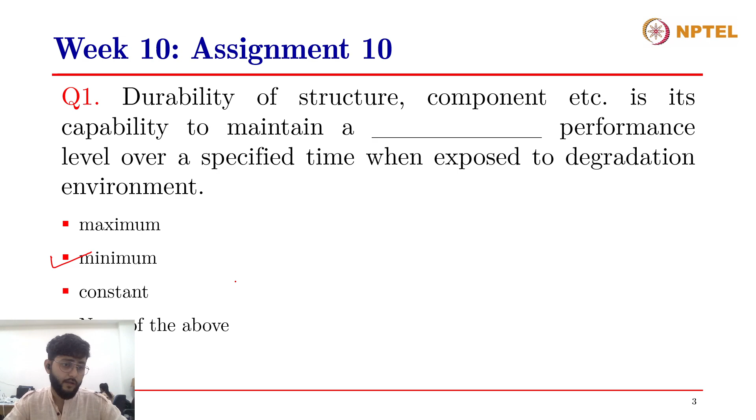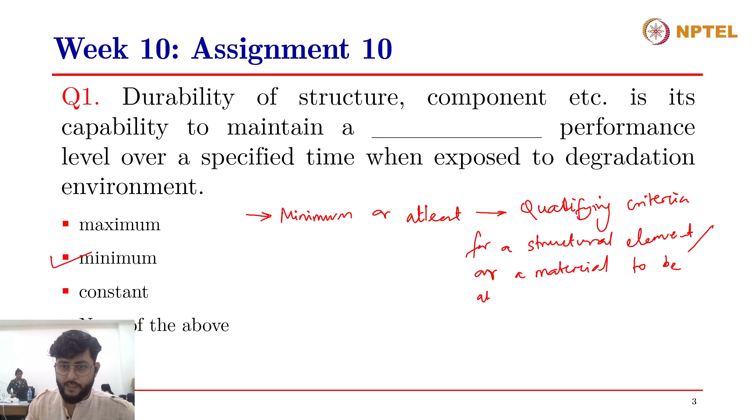Or when we talk about durability against fire, we rate our structures based on the R rating of a given element, meaning that a given beam or a given structural element should be able to sustain a fire of this degree till at least 3 hours or at least 4 hours. So we use these kinds of minimum criteria, minimum or at least. These words mention the qualifying criteria for a structural element or a material itself to be able to provide us with acceptable performance. Provide acceptable performance, right?

This is the answer to this question: durability of a structure is its capability to maintain minimum performance level over a specified time. Again, the keyword over here is specified time. You have to mention the time in which you want this performance level to be maintained.

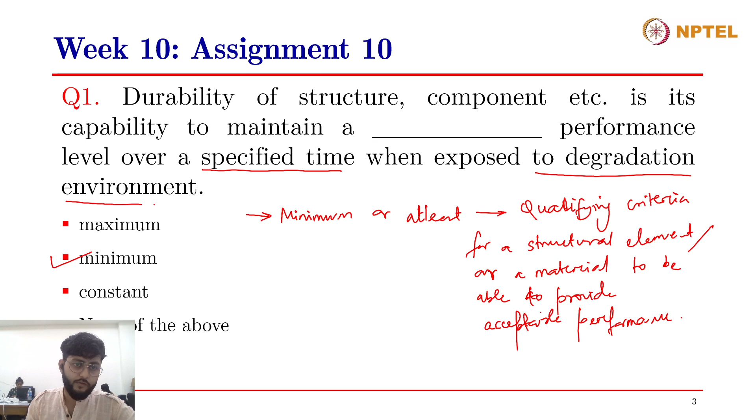And the second most important parameter of it is exposed to a certain degradation environment. A structure that is durable in one environment might not be durable in another environment. So you have to also specify the kind of environmental exposure that you are providing to the structure for it to qualify the degree of performance level that you're mentioning, right? So this is the correct answer to the question.

Moving on to the second question, it is an assertion and reasoning kind of a question. The assertion here mentions that magnesium sulfate ingress is more dangerous than sodium and potassium sulfate ingress. And the reason that they have mentioned is CSH is not stable in the presence of magnesium hydroxide. So you have to answer if the assertion is true, if the reason is true, and if the reason is the correct explanation of the assertion or not.

The assertion here, I'll repeat, magnesium sulfate ingress is more dangerous than sodium and potassium sulfate ingress. And the reason they have given is CSH is not stable in the presence of magnesium hydroxide. Yes? Can you answer this question? Yeah, assertion and reason are true, and reason is the correct explanation of assertion.

Right, right. Because this sulfate is more, chemically it is more dangerous than sodium sulfate. That is the reason I'm thinking that way. Mm-hmm. Thank you, Abdul. Yeah, that's the correct answer. But could you be more specific as to how magnesium sulfate is more dangerous as compared to sodium and potassium sulfate ingress? Like, how does it affect the system chemically?

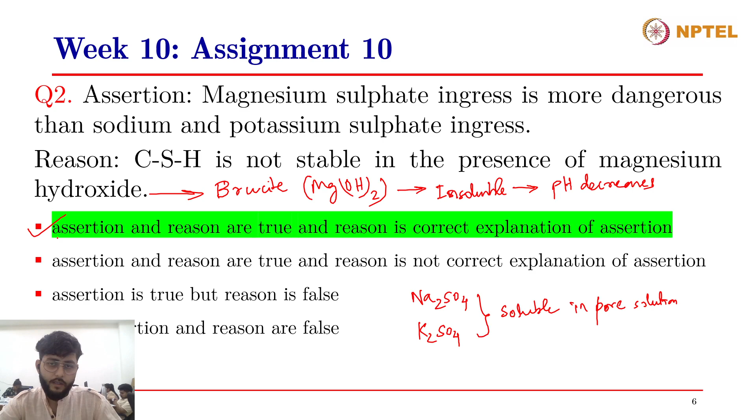All right. Moving to the third question. To improve resistance against sulfate attack, which of the following is reduced in the cement? C3S, C2S, C3A, calcium sulfate, CaSO4. This is alite, this is belite, this is aluminate, and this is calcium sulfate.

Yes, which of these is the correct answer? To improve the resistance against sulfate attack, which of the following phases is put in reduced amounts in the cement? That is aluminate. Reducing aluminate improves resistance against sulfate. That's why sulfate resistant cement is also used in this case, right?

Normally, especially for underground structures and all these things, if the soil has sulfate content, then sulfate resistant cement is recommended in such conditions, isn't it? Yeah, right. That is the answer. Answer C3A. That is the correct answer.

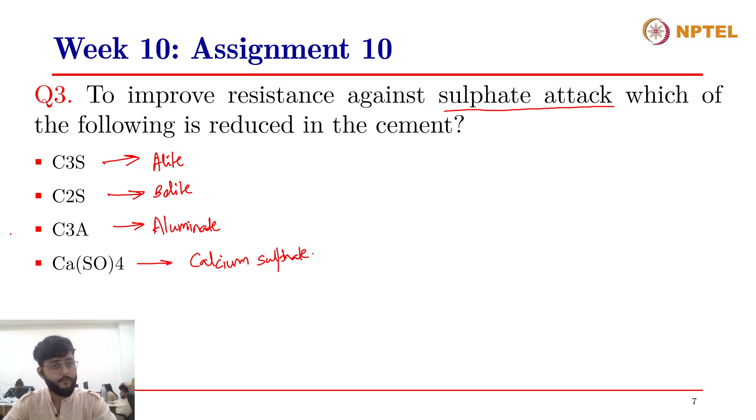That is a deterioration for the concrete. Some residues will form, and there is a tendency for cracking and all this. Right, right. Thank you, Abdul. So you're right over here. C3A content is reduced in order to improve the resistance against sulfate attack, and this is exactly why sulfate resisting cements have low C3A content. The aluminate content is low.

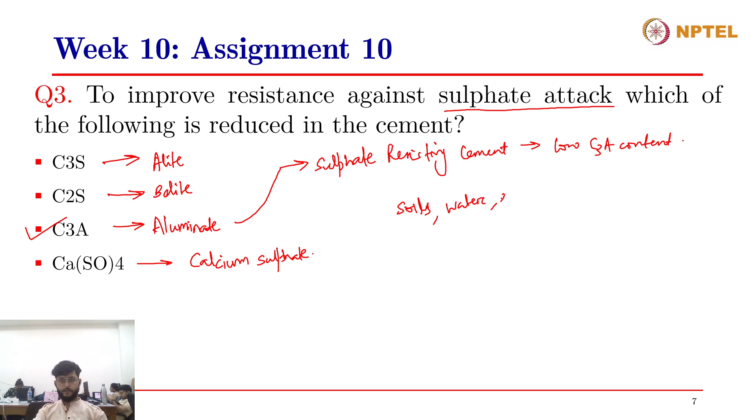What happens when there is excess of aluminates and the concrete undergoes a sulfate attack? Usually the source of sulfates is soils or water sources. From these sources, the sulfates come into the structures. Mainly foundations, structures in contact with the soil, bridge piers, retaining walls, and so on. Whatever structures are in direct contact with sulfate sources like soil or water.

When the cement has a high aluminate content, and we add some amount of gypsum in the cement as well, the aluminate and the gypsum at an early stage react to form ettringite. We have discussed this in previous sessions, but I'll highlight it again. C3A plus gypsum plus water react at an early stage to form ettringite. Gypsum is a source of sulfate initially. By early stage, I mean the concrete is in a fresh state. It is still plastic. It has a lot of voids.

Whenever the ettringite is produced, since it is a crystalline material, it occupies a larger volume than the unhydrated cement itself. And when this ettringite is formed at an early stage, it contributes to strength, right? But what happens when there is excess of aluminates in the cement? Some aluminate has already reacted early and produced ettringite, and the concrete is now stable, but there is still some unreacted C3A present inside the cement, and there is a sulfate attack.

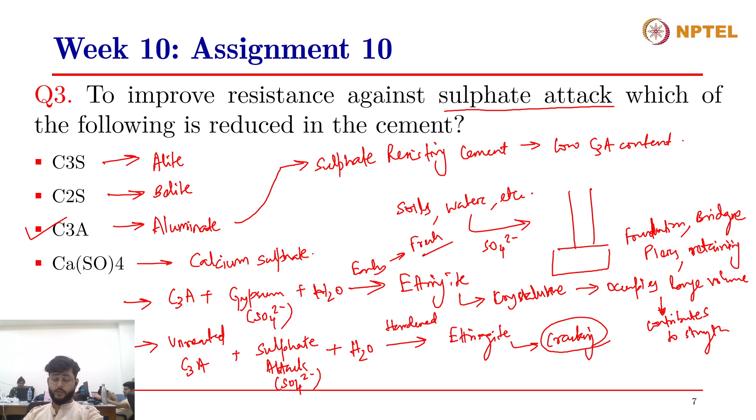So, to increase the resistance of your concrete or cement against sulfate attack, you need to ensure there is not much unreacted aluminate present at a later stage. For that, you need to ensure from cement production itself that the aluminate content is low. So this is the correct answer. To improve resistance against sulfate attack, it is the aluminate content that is reduced, and therefore sulfate resisting cements contain low aluminate content. Right.

Moving on to the fourth question: to reduce sulfate attack, which of these is favorable? There are three statements: low aluminates, low water to cement ratio, and use of blended cement. Which of these is favorable and why, to reduce the effect of sulfate attack?

Yes, can you answer this question? Yeah, the answer: low C3A, that is low aluminate, low water-cement ratio, and use of blended cement. These three are favorable to reduce sulfate attack, so the answer is 1, 2, and 3. Okay, you mean to say that all the statements are correct. Can you also explain why?

I mean, we have already discussed low aluminates. Low C3A, that means aluminate, in the case of sulfate resistance. Right. Low water-cement ratio means the water-cement ratio is reduced, so the strength will increase and porosity will reduce. Yes, porosity. And the use of blended cement, like fly ash and others, workability will increase, and silica fume concrete and all these things are connected. Blended cement. Yeah, okay, I'll explain the fact about blended cements also.

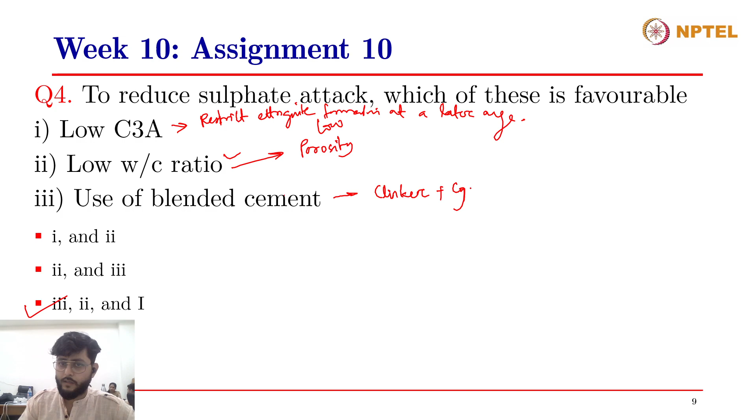Low aluminate was to restrict ettringite formation at a later age, right? At a later age. And finally, use of blended cements. It is similar to what we discussed about water to cement ratio. Blended cements contain clinker plus gypsum, which is OPC, and some SCM. It could be one SCM or a combination of different SCMs.

Excuse me, sir. I am breaking my fast for 10 minutes, so I won't be available online. After 10 minutes, I will be back online. Yeah, not an issue. Anyway, I'm recording the session, so you can always check it out. Yeah, I will catch the recorded session. It's all right, Abdul. Go ahead. Okay, sir.

So I was talking about blended cements. Blended cements are a mixture of clinker, gypsum, and any SCM. It could be fly ash, slag, metakaolin, a combination of these, or limestone, as in the case of PLCs. In blended cement, the SCMs are finer materials; they have a very high fineness, and due to that, when blended cement samples get hydrated, these SCMs can take part in the reaction, and when they haven't reacted yet, they can contribute to blocking the pores.

Usually the porosity is reduced in the case of blended cements, but it has also been observed that even if the porosity increases a bit compared to OPC systems, the pore connectivity is reduced. When pore connectivity is reduced, the ions cannot move from one location to another to react with the aluminates or any other material, and therefore this also reduces the risk of sulfate attack. So fine materials like SCMs refine the pore structure and therefore reduce the ingress of sulfate ions.

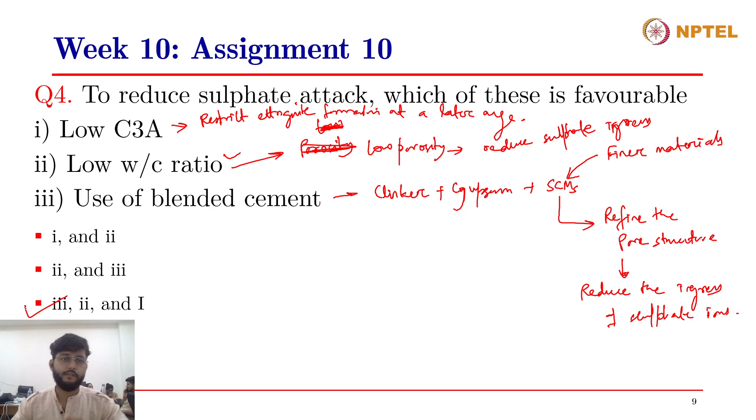Low porosity reduces sulfate ingress. This is also the same aspect of it: reduce the ingress of sulfate ions, right? So all the three statements are correct with respect to reducing the sulfate attack.

All right. When we talk about blended cements, and I also mentioned Portland limestone cement, we should be careful when we say that use of blended cement can reduce the risk of sulfate attack. Yes, it can reduce the risk of sulfate attack, but sometimes when we use carbonates in our blended cements, like in the case of Portland limestone cement, PLC. So limestone is a source of carbonate, or when your aggregates contain carbonates,

or in the case of limestone calcined clay cement, when sulfate attack occurs in the concrete and there is a presence of carbonates in the environment, it could lead to thaumasite formation. What is thaumasite? It is a hydrated calcium carbonate silicate. So calcium carbonate silicate hydrate, as we call it.

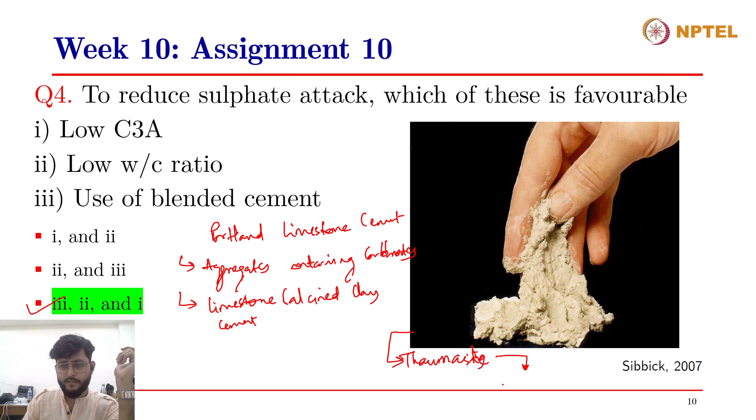So it is a very soft material. It is insoluble in water, and it makes the concrete soft, and the concrete loses its strength. So we want to reduce this risk of thaumasite formation in the concrete, and it usually is very rare. Thaumasite is formed at temperatures below 15 degrees Celsius. So it usually is very rare, at least in Indian or tropical conditions, that thaumasite is produced.

But even if we are using these cements in other areas which experience very low temperatures, we should be careful while using blended cements containing carbonates. This could produce deleterious effects of thaumasite formation under sulfate attack. So yeah, that is just a piece of information.

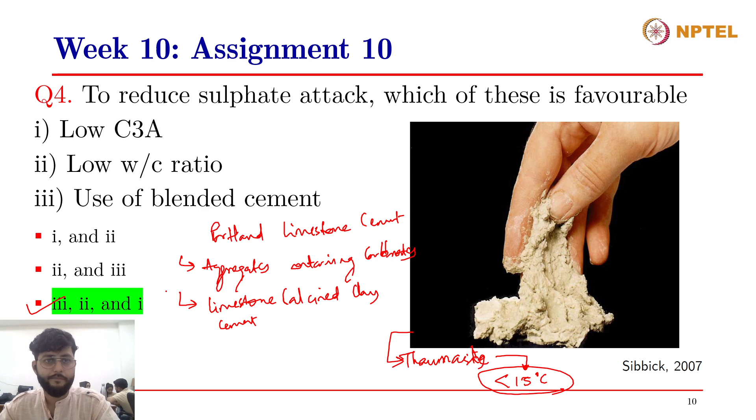Anyway, moving to the fifth question: which of the following statements is true regarding reducing alkali silica reaction in concrete? There are five statements they have given. The first statement is prevention of moisture ingress. Statement 2 is use of non-reactive aggregates. Statement 3 is use of blended cements. 4 is use of lithium-based admixture. 5, use of cements with high sodium oxide content. Which of the following statements is true regarding reducing alkali silica reaction in concrete?

Which of the statements are correct? Can anyone answer this question? Abdul is away for some time. Pavitra, would you be able to answer this question? Which of the following statements are correct with respect to reducing alkali silica reaction in concrete? Prevention of moisture ingress, use of non-reactive aggregates, use of blended cements, use of lithium-based admixture.

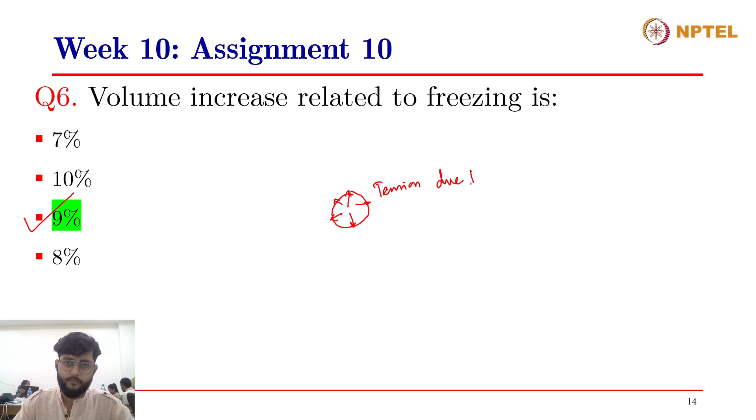Right, exactly. Concrete is bad in tension, it doesn't perform well in tension, and therefore it cracks. It cracks initially at a microstructural level, but then subsequent freezing and thawing cycles across a long duration, let's say 700 or 800 cycles of freezing and thawing, could lead to expansion of these cracks. And then these cracks start to show on the surface of the concrete element as well. Right? Got my point? Yes, sir. All right.

All right, moving on to the seventh question. In rebar corrosion, at the cathode metal dissolves, and at the anode electrons react with oxygen and water. Is this a true or a false statement? The question is, in the case of rebar corrosion, the cathodic reaction consists of the dissolution of the metal ions, and the anodic reaction consists of the electrons reacting with water and oxygen. Is this a true or a false statement?

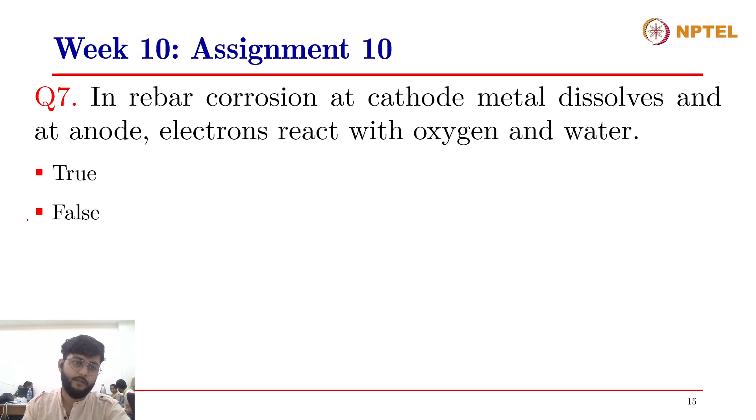It is false. The rebar corrosion, cathode or anode, actually this statement is reversed, I think, isn't it? Yeah, it is reversed. Yes. Right. Yeah, that's why this is false. Right, right. You're correct. This is a false statement.

So the anodic reactions, not just in the case of rebar corrosion, in the case of any galvanic cell kind of a system, the anodic reaction is always an oxidation reaction. So oxidation reaction is the release of electrons, right? So when something oxidizes, it releases electrons.

So I have taken this view graph from the book by Mehta and Monteiro, and you can see over here, this is an anode on the surface of the metal. This is Fe, meaning this is the rusting or the corrosion of iron, and at the anode end, the metal dissolves to produce Fe2+ ions, and the cathode is essentially where the electrons flow and the reduction reaction takes place. So at the cathode, it is the reduction reaction.

Oxygen and water react with the electrons released from the anode section of the metal. So this also releases electrons, right? Fe2+ they have shown over here. So it releases both metal ions and electrons. And these electrons travel to the cathode end and react with oxygen and water. So that is the cathode process. So the cathode process consists of the oxygen and water reacting with electrons, while the anode process consists of the release of the metal ions and the electrons. So this is a false statement.

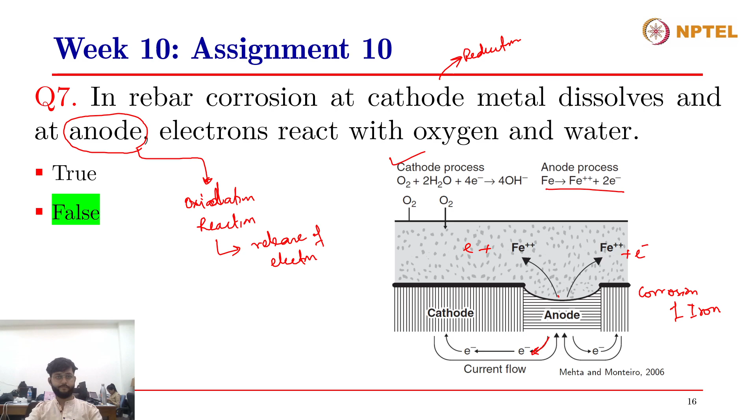All right. Moving on to the eighth question. Which of the following is required for the corrosion initiation? Depassivation, moisture, oxygen, all of the above. All of the above, sir. All of the above, right? Sir, oxygen, all are required for corrosion initiation. Right, yes. So you've mentioned it rightly. All of the above. Yeah, all of the three components are required for corrosion initiation.

So first is the depassivation. As we have seen in the previous picture as well, when there is a rebar inside the concrete structure, this is a rebar embedded inside the concrete. Due to the high pH conditions inside the concrete and what we call the initial corrosion products. The initial corrosion products are essentially the oxides that are formed over the rebar surface, and they act as a passivating film. So these initial corrosion products, or the initial oxide formation on the surface of the rebar, produce a passivating film.

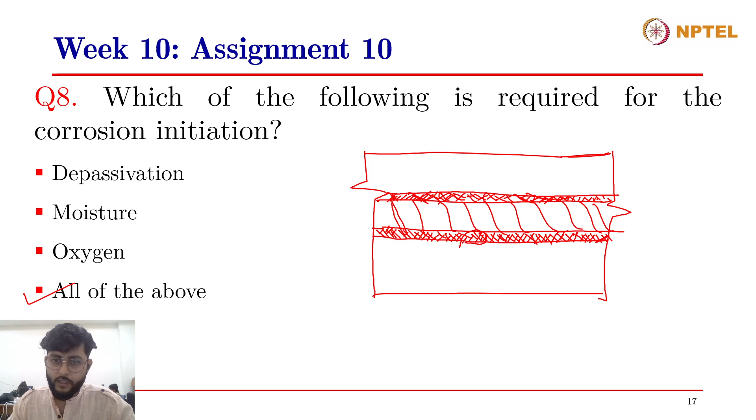So this is the breaking of the passivating film, and then the ions come to this location, and that's how the corrosion is initiated. So the first and foremost requirement for the corrosion to occur is the depassivation, or the attack on the passivating film. So this is a passivating film consisting of what we call initial corrosion products or initial oxides. It consists of the metal oxides.

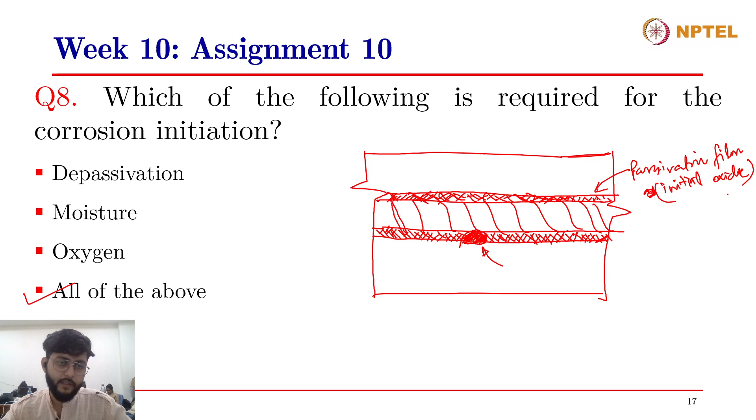Then the second and again an important parameter is the presence of moisture. Without the presence of moisture, the ions won't be able to travel, and let's say in the case of carbonation, even if the carbon dioxide gets inside the concrete, it won't be able to convert into carbonic acid, and therefore it won't reduce the pH, and there will be no corrosion. Similarly, in the case of chloride-induced corrosion, for the chloride ions to travel within the pores onto the site of the rebar location, there has to be sufficient moisture for them to travel inside the pores. So moisture is a requirement.

And finally, there's the requirement of oxygen, as we have seen in the previous slide as well. So all the three parameters are required for the initiation of corrosion. So the correct answer to this question is depassivation, moisture, and oxygen. All the three are required, therefore all of the above. This is concrete, and this is rebar. This is pitting. All right.

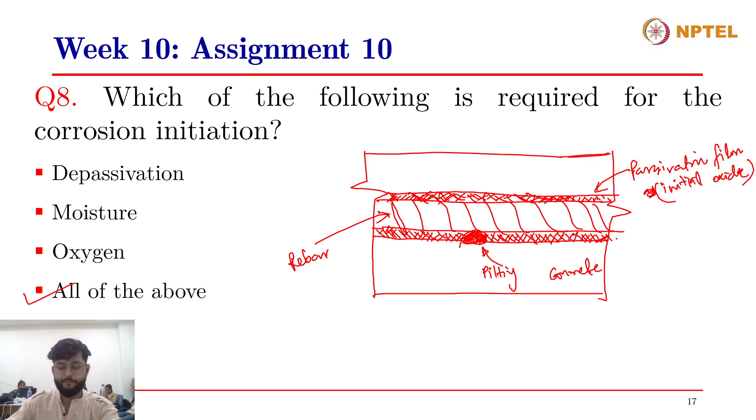The ninth question is again a data-based question. Total chloride limit for pre-stressed concrete is 0.35 kg per meter cube, 0.4 kg per meter cube, 0.5 kg per meter cube, or 0.6 kg per meter cube. Which is the correct answer? It was discussed in the lectures probably. That is 0.4 kilogram per meter cube. As per IS also it is mentioned like that. Right, 0.4. As per the Indian standards, the total chloride limit prescribed for pre-stressed concrete is 0.4 kg per meter cube.

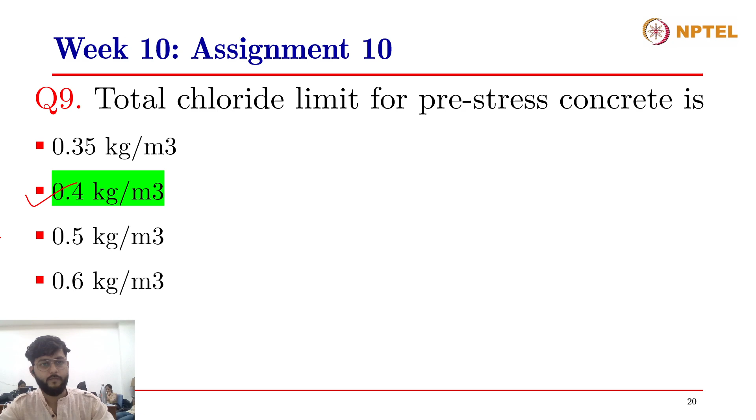Moving on to the last question of this assignment, the 10th question. Chloride threshold is dependent on which of these factors? The cement type, the aggregate type, the aluminate content, or the steel type?

Yes. So, what is chloride threshold? Can you explain? Also, can you explain how these three factors affect the chloride threshold? This aggregate actually has nothing to do with the chemical action. Aggregate is an inert material. Cement is chemically active, and C3A content, that is aluminate, is also chemically active, and the fourth item is steel.

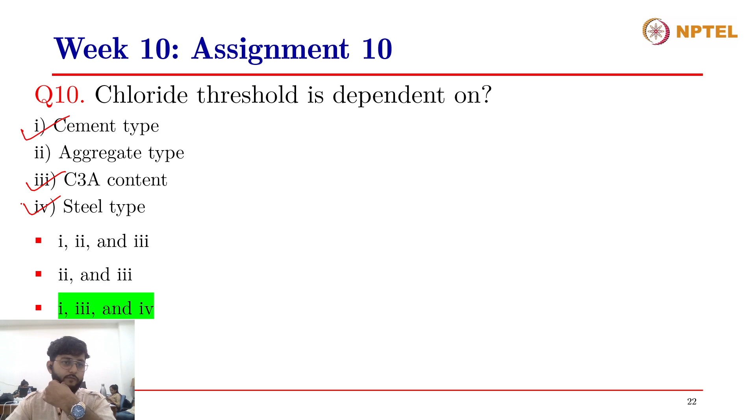And the chloride threshold of a given system of concrete, I mean cement and steel, is not just dependent on the chemistry or the microstructure of the cement, and not just on the steel type itself. It is a combined effect of the cement and the steel properties that produce the chloride threshold of a given system. So the first and the fourth statements are correct. Cement and steel type both in conjunction affect the chloride threshold of a given system.

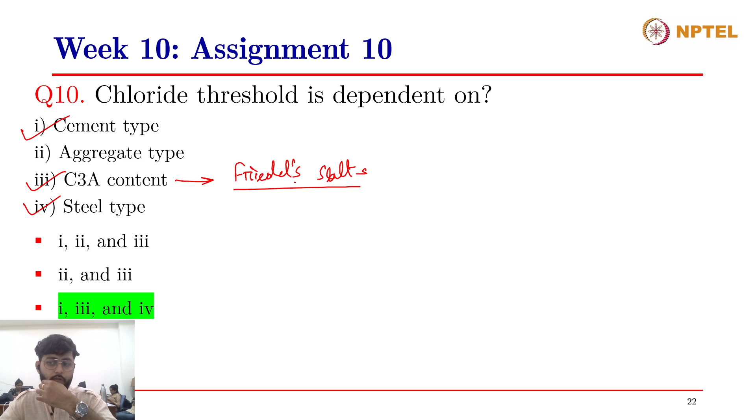And finally, C3A content. I'm not sure if it was discussed in the lecture or not, but aluminates in the presence of chlorides produce Friedel's salts. And when Friedel's salt is precipitated inside the concrete, the chlorides present in the form of ions will be reduced, and therefore the chloride ion concentration is reduced, and the chloride threshold will be increased, right? So the concrete system will be able to take more chloride ingress before corrosion initiates. So the threshold is in fact increased when there is Friedel's salt formation inside the concrete.

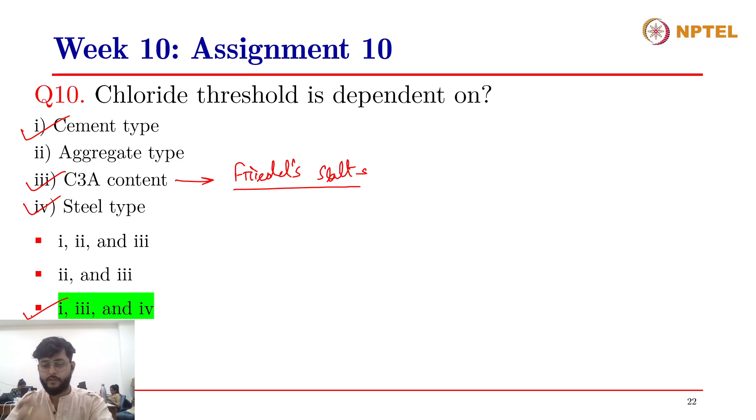So all these three statements are correct. The cement type, the steel type, and the C3A content in the cement, all of these three factors govern the chloride threshold of a given cement and reinforced concrete system. Right? So that was the end of the assignment questions of week 10.